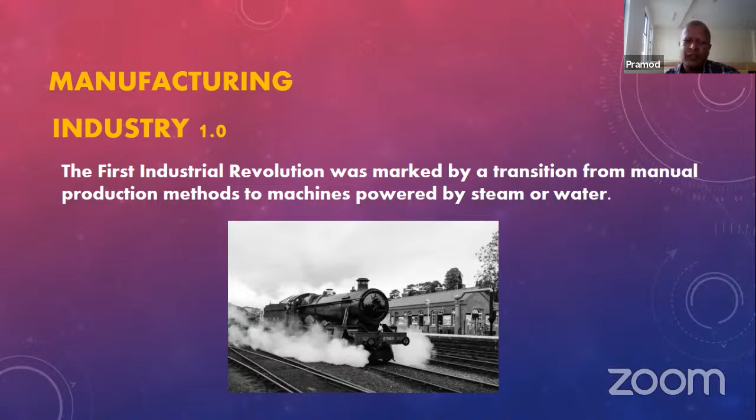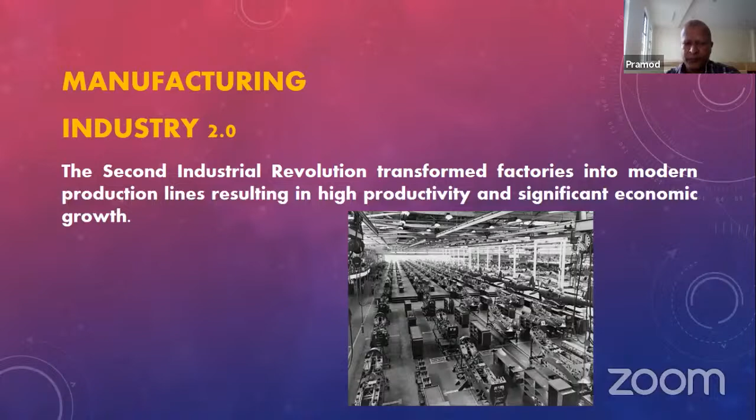So the world came up with the next concept, Industry 2. What did Industry 2 look into? Mass production. Machinery came into existence, high production came into existence, and there was significant growth in the economy. Mass production, which was considered the most efficient technology, was overtaken by lean manufacturing, which I've been discussing in the past 3 days. Lean manufacturing is a more efficient method than mass production, where we can zero down the inventories and zero down the defects. That talks about Industry 3.

Industry 3 talks about the technologies next to lean manufacturing, where we can use CNC machines. I think almost all of you know how a CNC machine works and how efficient it is compared to conventional machines. Even now, all the industries are using CNC machines; they have been in existence for maybe the past 5 decades. In Industry 3, I mention manufacturing which refers to subtractive as well as additive manufacturing.

Some might quote that additive manufacturing is Industry 4. I say it falls under Industry 3 rather than Industry 4. Why? I will come to that: why additive manufacturing doesn't fit there, or why it has to upgrade itself in order to fit into Industry 4. I will come to that in the next slide.

Industry 3 also had computer aided manufacturing. I think we all have knowledge of what CAM is, and we handle the subject CAD CAM, right? The NC program can be fed into CNC machines, and it will ensure the components machined out are of perfect dimensions. So Industry 3 was perfect even until 2010, and is even perfect now.

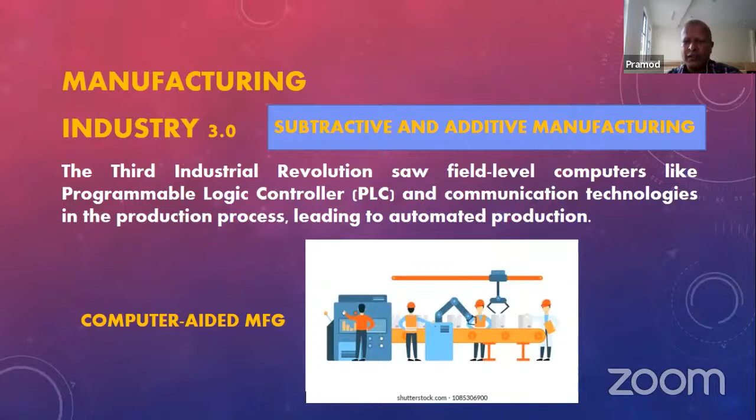So the next slide talks about Industry 4.0. As I said, it came a decade back, 2011. The term Industry 4.0 was first named by the German government. Germany was the one who tagged Industry 4.0, and I think most of you are already familiar with these terms: cyber physical system, IoTs. We have been hearing these words in the past year or few months.

So what is a cyber physical system? It's an interaction between the physical system and the cyber world. When it comes to manufacturing, they term it a cyber physical production system, which relates to manufacturing. Then again, Internet of Things, IoT. It depends what stream we are referring to. When we are referring to manufacturing, all the things which come into the cyber physical context are manufacturing things.

So let us leave CPS as well as IoT to the software people. There is not much mechanical in that. It's a communication between the systems. Even if we want to get well versed in CPS, from my point of view, it's a bit time consuming. So let us stick to the AI thing, the machine learning.

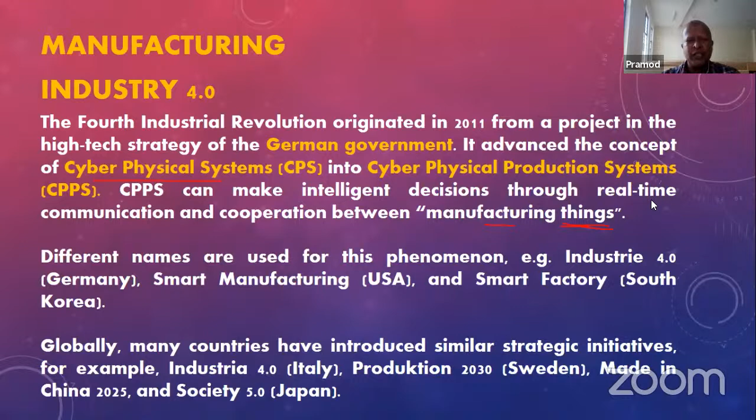So you can see Made in China 2025. They want everything to be made in China by 2025, maybe another 4 years. You know what happens when we talk about made in China; it will be made in China itself. Japan and Italy term Industry 4.0 in their own specific way. Even if India grows in AI in competition with Germany, the US and other countries, we can come up with a new term. But it all talks about one stream, the AI applications.

As I just mentioned, to avoid tool wear before it happens, to avoid machine breakdown before it happens, to avoid noises or vibrations before they happen, which is possible only by AI methods. So I term them as out-of-process condition monitoring, which was faced in Industry 3, and in-process tool condition monitoring in Industry 4.

So if we want to jump into the research topics now, other than materials - if you are in core manufacturing, I suggest jumping into in-process tool condition monitoring, which is nothing but what industry 4.0 grant people look into. These are the buzzwords when you talk about in-process tool condition monitoring.

Okay, so out of process tool condition monitoring - this has been adopted in industry 3, or you can say industry 2.5. So wherein if the tool wear happens, we have to stop the machine, get the tool out, get it studied, find the crater wear, find the flank wear, then come up with the solution for that. So during that study time the production is stopped, right? So that stoppage of production can be avoided by industry 4, what I call in-process tool condition monitoring.

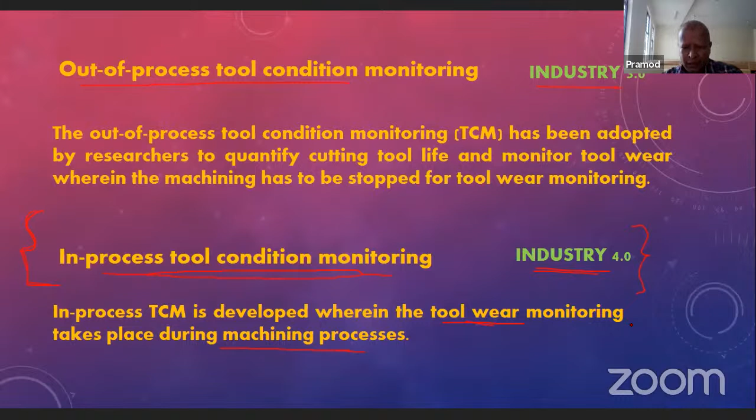So even if you go to the ISRO website, they come up with problem statements every year, and you will find this problem statement in their research problems, whatever they highlight every year. Definitely you will find here - they will mention it as difficult to machine, or machinability of the superalloys. So even they are working on it.

So in-process will not, I can say, provide 100% solution, but will provide much more solution when we compare it with the out-of-process tool condition monitoring. I will talk about this in detail later. So this is what differs between industry 3 and 4.

So to jump over to industry 4, as I said, using AI is not so easy, because we need a ladder in between these two. Right now the production, the industries are balancing on 3 and 2, or I can say 2.5 and 3. Now they're trying to jump over to the 4. Just to jump over suddenly to the 4 is not easy. Why I tell you - industry 3 all talks about computer integrated manufacturing, wherein we have been using computers to run the machines to get efficient way of production.

So as I said, industry 4 is whatever problem that exists in the automation can be solved by using algorithms. So how do we build these algorithms?

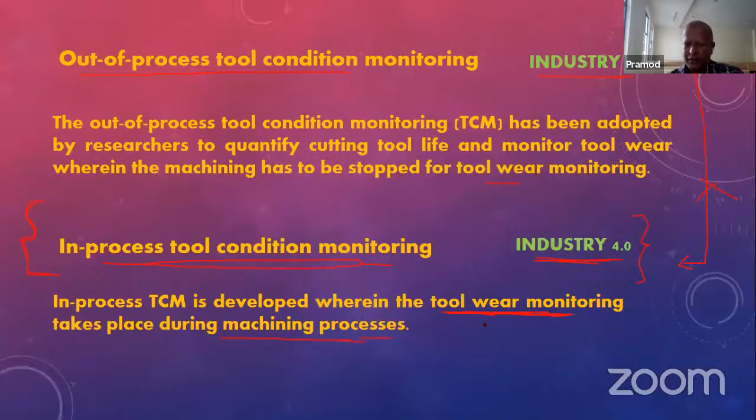And what problem? This is what it highlights - we can predict the tool wear of a particular cutting tool before it fails, before it breaks down. Okay, so Python, C++, it's a basket of arrays, it's printf, scanf, it has loops. All this comes in C++.

What happens, what the more enhancement in Python is, it's a bit more flexible compared to C++. So we can compile it easily, meaning less errors. Even if we miss some commas, miss some brackets, that will be fine by Python - it's more flexible for the users. That's Python. Even you can use C++, which comes in Visual Studio, to develop an algorithm. I will also show how to develop the algorithm with flowcharts.

Okay, so again, I think most of you are not familiar with Industry 5.0 now. Globally, some of them, 70% are talking about 4.0, remaining 30% are already into 5.0. Now this is a bit exhausting. We are into 4.0, we are just a toddler there. Now we talk about Industry 5.0. So what is this Industry 5.0?

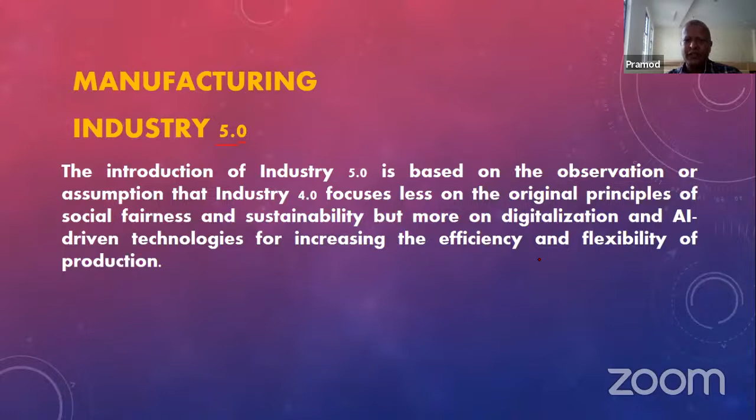So Industry 4.0 is a technology driven, AI based manufacturing. Industry 5.0 is a value driven initiative. And 4.0 focuses less on the original principles of sustainability, whereas this one focuses more on sustainability.

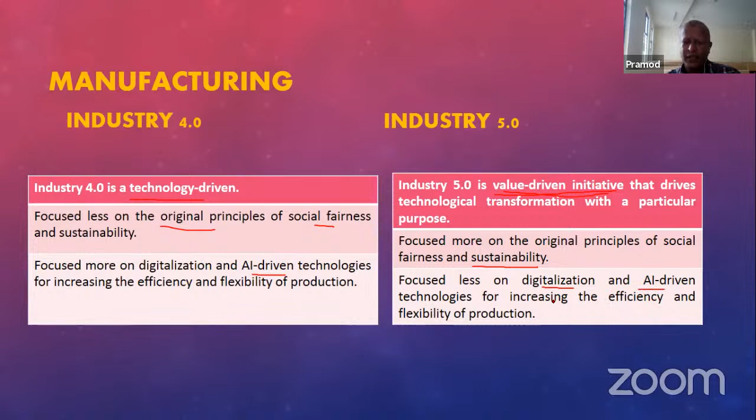So here we have AI driven technologies in order to control, in order to make it more efficient than what we found in Industry 3.0. Industry 5.0 focuses less on AI driven efficiency, and what it more focuses on is this one. So in all the aspects we look into this. When we talk about AI, that means we are looking into efficiency in terms of energy, in terms of efficiency, in terms of smart materials.

Okay, that's very good. So now what are the side effects of that? Economy, CO2 reductions, human centricity, because when we bring AI, already we have removed most of the direct labors, or maybe we are already out of indirect labors because we have CNC machines. So when we compare CNC with conventional, we need indirect labors more there, but when you talk about CNCs, we need less indirect labors.

Now when we talk about Industry 4.0, we even don't need direct labors, or their interaction with the machines is reduced. The percentage of interaction of the direct labors in production is completely reduced when we compare it to Industry 3.0.

Okay, so now what happens? That means there is a lot of job loss, especially in India. In India we are more populated, so we are less into automation. Even if you see small scale industries, they have lathe machines. We have a lot of people to work on that. Even whatever quantity is required, we can achieve that by conventional way. So what happens if even the industries of India talk about Industry 4.0?

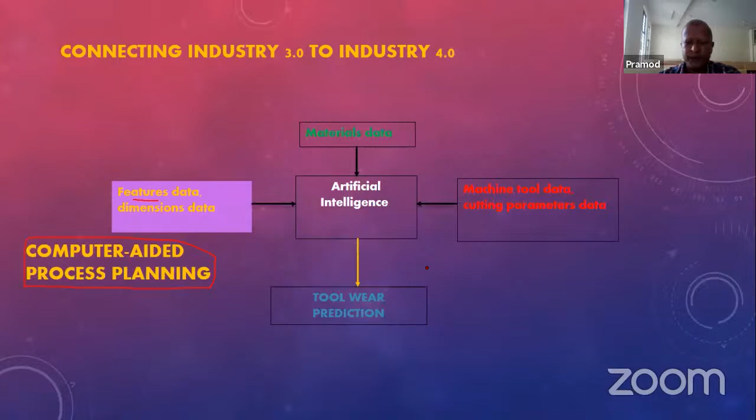So when we have all this data, we can go for the tool wear prediction, because when we talk about AI, it's automation—completely automated, or with 5% human intervention. So I term this CAPP as a bridge between 3 and 4, so it's 3.5.

So what manufacturing is all about, as I think we are already familiar with these stages: idea generation, CAD model, then CAM, machine out using CNC machines, we get the product. So what lies between these is the CAPP. What lies between these is the CAPP.

So this CAPP is built on these techniques: feature based, knowledge based, neural networks—almost all of you are familiar with this stuff—genetic algorithms, fuzzy logic, Petri nets, agent based. There is also the volume decomposition method. These are the most efficient approaches.

So wherein we can make the computer do the process planning for us. In order to do the process planning, it has to identify all the features. As I said, all the features means it has a cavity, a protrusion, a boss, a slot in it. So those have to be identified by the CAPP. So how will it identify? It's not a human being. So we have to make it identify. We can depend on these techniques.

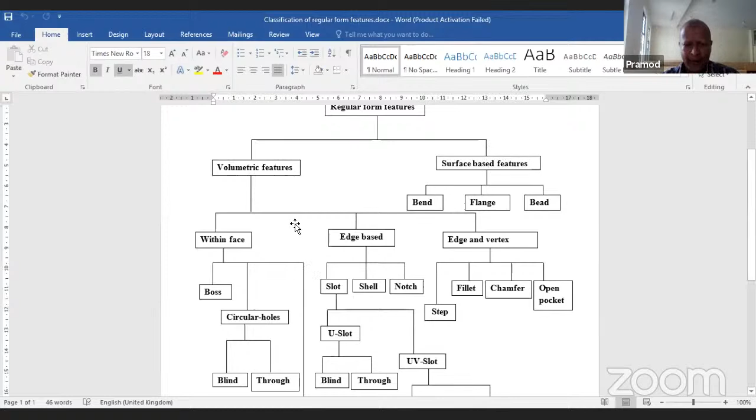And surface based features are the ones which have thickness less than 3 mm, maybe our cell phone covers, they are surface based models. Or when we talk about automotive components, the BIW, body in white, or the car models, they are surface based models. So when we design using SolidWorks, we can create a surface based model which can be used for meshing and analysis, and we can create a solid model which has a mass in it.

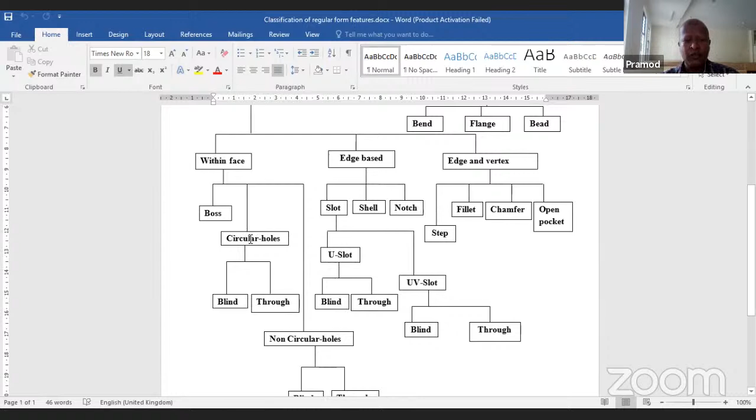So we can further subclassify them based on the type of faces and the edges they have. Notch and slot we are familiar with, shell features, and UV slots, U slots; again they may run through the component, or not run through, which I call blind. Drilled holes can run through the component, which we call through holes, blind holes, and non-circular holes. Non-circular holes are also called pockets, so again we have through pockets and blind pockets.

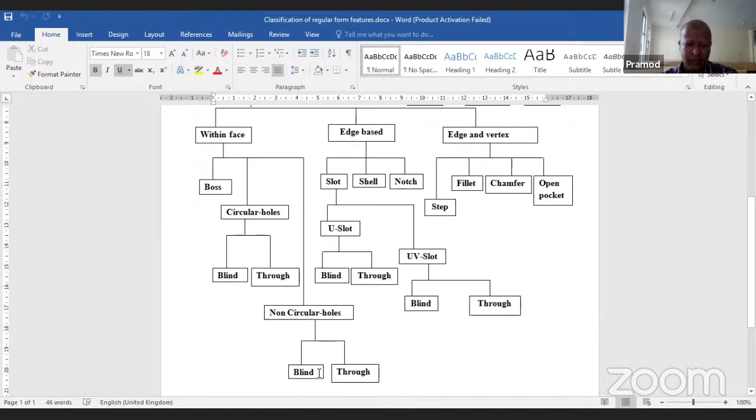So this is about the regular form, where the components have planar surfaces, completely made of plane shaped surfaces. What about irregular surfaces? As I mentioned, impellers have blades with spline based surfaces, so they are very difficult to identify. So how to identify them? There we come across the term topology. Topology includes the surface, the edges in it, the vertex points in it. We can use those topologies and build an algorithm on that.

So volumetric features in terms of free form, we can call them free form slot, free form hole, free form boss. Again, surface based features: bump, ridge, dart. So we first classify them, how we are going to identify them comes later, and I will again go back to the PPTs.

Okay, so I just classify them as regular free form. Okay, so coming back to the V block. Okay, so I've taken one example here. V block, I think most of you are familiar, we use in the metrology labs.

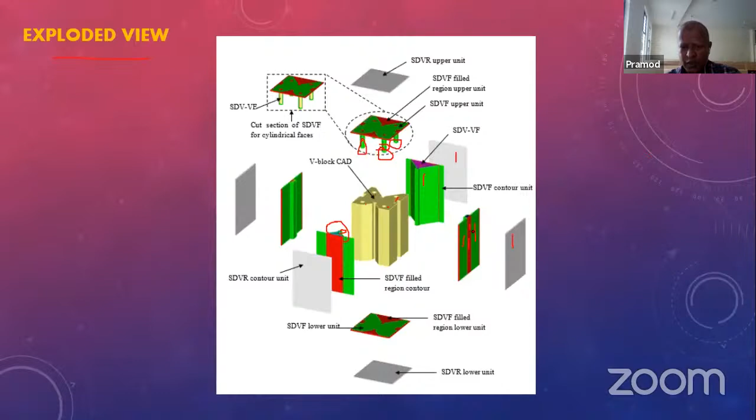So what is the total material that has to be removed? This is called roughing. Sub delta volume for roughing process, sub delta volume for finishing process. I just term them as per their processes. So this gray color includes the roughing process, and the green color includes the finishing process.

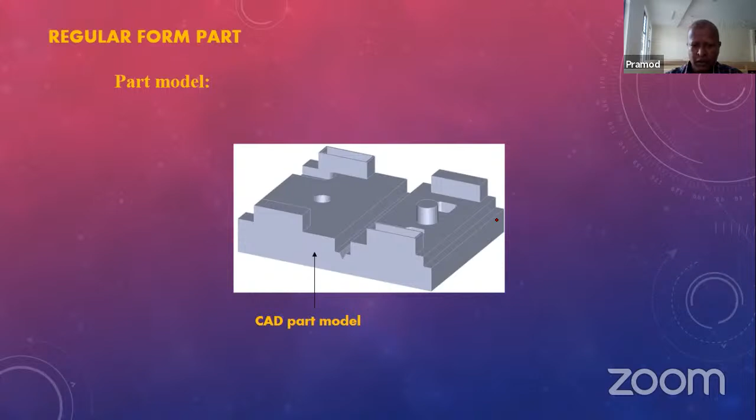Okay, so this is about the V block, what we can achieve using the CAD model by CAPP. Next, what happens if we have a more complex regular model? So this is a bit complex regular model. So what our algorithm can do, it can identify the features or not. So when we input this to the algorithm which has been statically built,

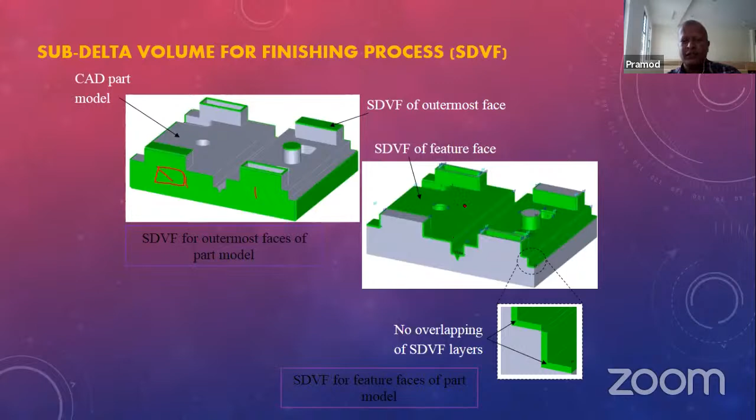so here it's a reverse engineering. We can get all the material that has to be removed, or I say that is removed. Okay, this is the finishing layer, and one more way of identifying the features is by these combinations. So CF means chamfered face, and B means boss face, and P means peripheral face. This is chamfer face. Okay, so I will just tell you one example here.

So let us look into this through circular hole. Okay, so how does this make? Here is the combination. So by algorithm, we can designate the surfaces or faces of the feature. So we have a component, we have a drilled hole. So the drilled hole has some surfaces in it. So we can identify the shape of those surfaces and designate them.

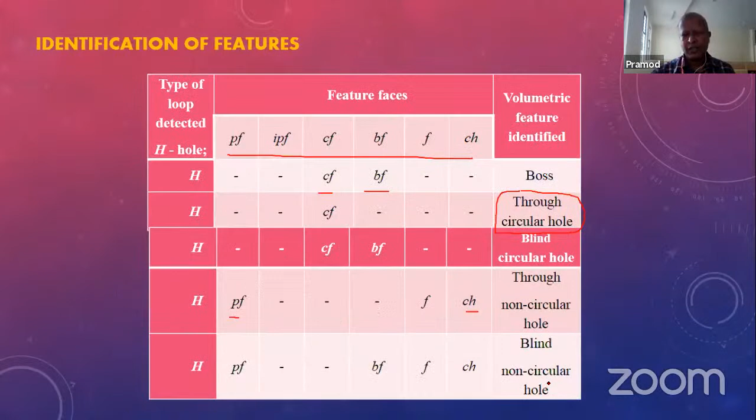Okay. So planar face, then planar face, filleted face, planar face, filleted face. So what this combination makes, it makes a pocket. So when we come to a drilled hole, circular faces, circular faces. A drilled hole means it's circular in shape, so it has circular faces or surfaces in it. So we can designate them. So these two combinations will give us what actually the feature is. Again the algorithm looks into this, it designates them, it comes up with the feature name.

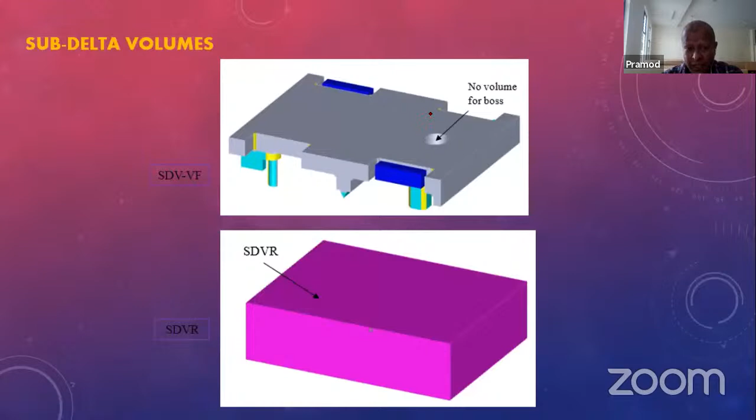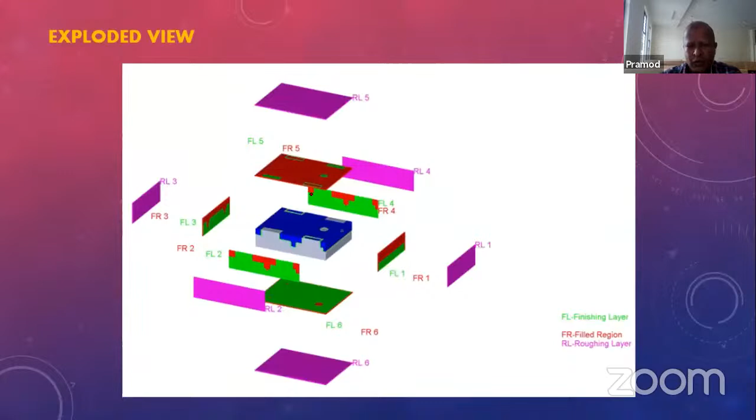This is another way of identifying the features, generating the material for that. So if you see, this is what material has to be removed in order to get the original component. So again, this is the exploded view. As I said, you can see the number of layers, or the colored materials, that have to be removed to get the particular shape. And also the quantity of the materials data can be achieved by these algorithms.

Okay, so what about free form? Some of you might be thinking, what if we use the impellers, if we use the car model? So these algorithms are built for volumetric features, volumetric part models, which have mass in it. We cannot use that for surface based features. If you have to, we can, but we have to look at the APIs, application programming interface functions. So we use APIs here. It's open source libraries we can get. So based on APIs, we can go into surface based part models.

So free form, again we can identify these features, then do the reverse engineering, build the materials. And you can see the missing material can be re-achieved by the algorithms. So how to identify? Because these are irregular shaped, we cannot name them. Next time this shape may be another way. So based on colors we can identify them. Wherever there is a planar face, we can give a color. Wherever it is spline based, we color it another way. Where it is cylindrical, another way. So these colors can be made standard and we can identify based on them.

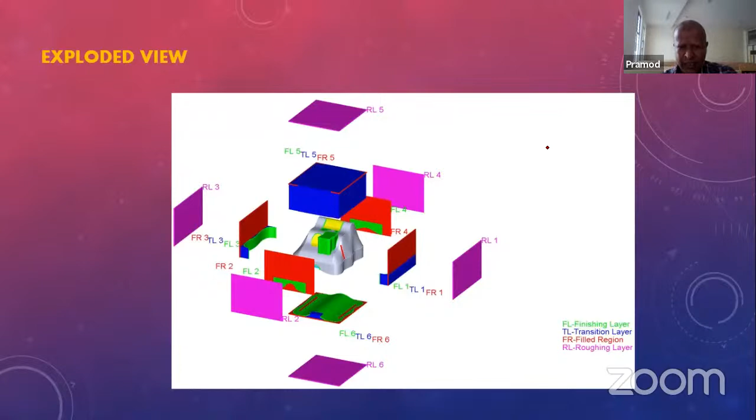So I will just highlight how to build these algorithms. As I said, I did this on the C++ platform, Visual Studio. So I will just highlight the flow charts which are used to build all this or to study these three cases.

So we can even get the chart of all the various color materials, which is the major material that has to be removed, and we have some equations to be used there. So level of complexity can be found, whether the component is complex or simple and can be machined out easily. Impellers are a complex component. So level of complexity, we can rate from 0 to 1. So 0.89, 0.79, 0.9, based on the shape.

Okay. So I'll just go back to share the flow chart here. I cannot include it in the PPT, it's a very big flow chart. So kindly permit me, I will just unshare this and share again.

Okay. I think the Word file is shared on your screens. No. No, brother. Okay. Let me try again. It's okay. Let me try again.

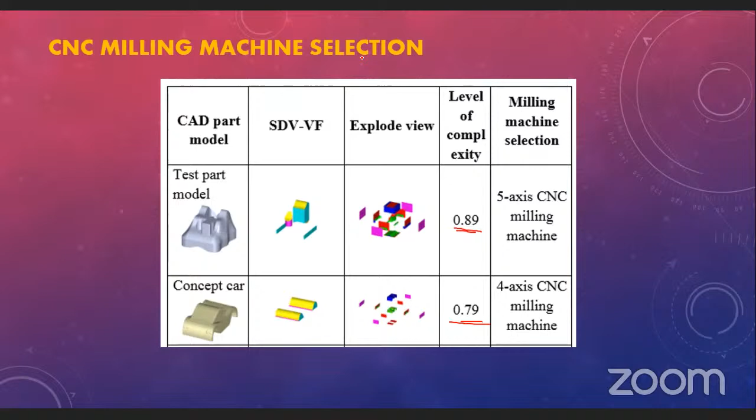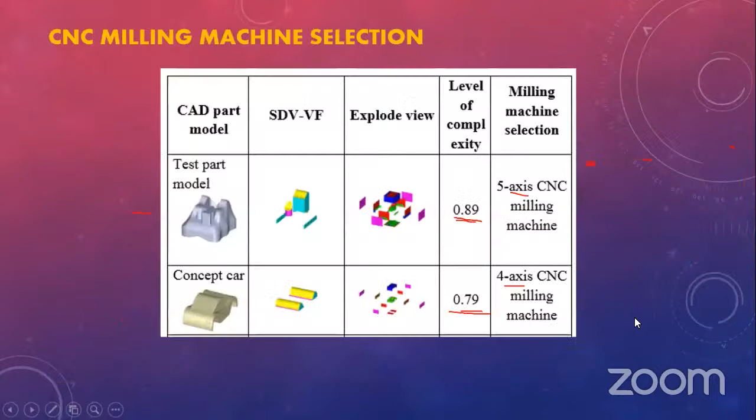Supervised learning. We will more focus onto this. So why we need supervised learning? Why we not talk about unsupervised learning? That's why I quoted here. Supervised learning means the training of a machine to enable it to choose a function describing the relation between the inputs and outputs. So by this supervised learning we can get the outcomes for what we have input. Here inputs refers to the machining parameters.

I said about machinability in my previous slides. Machinability of superalloys is very difficult. Some of you might be researching into that. Because the cutting tool has a catastrophic failure, we cannot say it fails at this particular cutting speed, which can be done in case of other materials. That catastrophic failure is the major cause. We cannot say at this cutting speed the cutting tool will fail for superalloys.

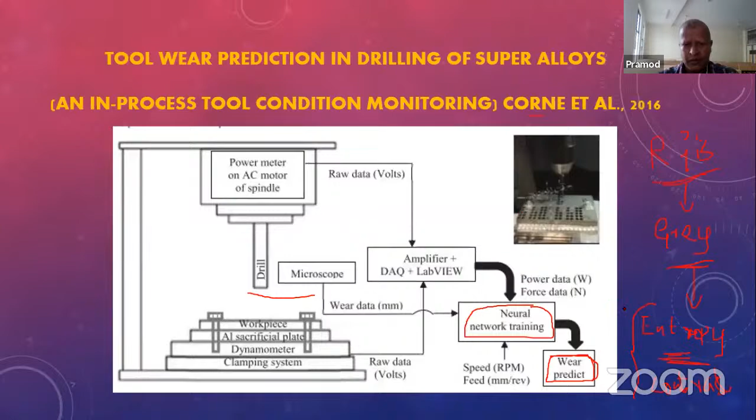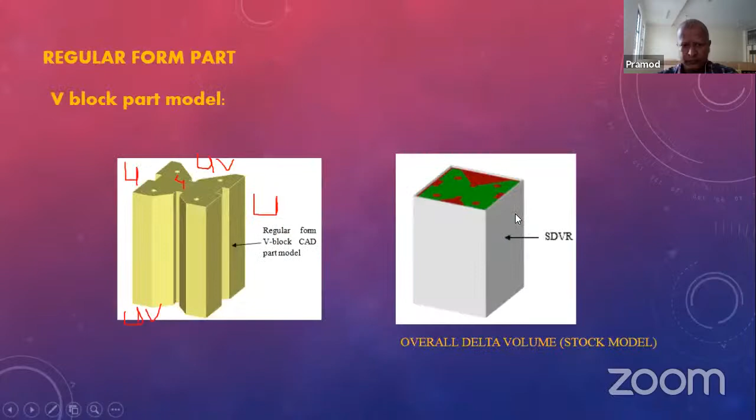I'd like to highlight one more point here. Coming back to our complete manufacturing model, I think now we have an overview. So idea generation, CAD - it's almost achieved. I'd like to highlight one point in this CAD. Has anyone heard about CMM? It refers to metrology. So can anyone derive what CMM is?

Coordinate based recognition - that's correct, coordinate measuring machines. So we have pointed machines wherein the pointed tool will come which can measure any complex machine, so we can measure the dimensions there.

So it's a way meaning the machine has to come in contact with the model to do that. These are tried to be replaced by 3D scanners now. So all of you are familiar, these are being replaced by 3D scanners. They are not up to the mark. It's being used, but very few industries are using these 3D scanners.

So wherein you use a portable gun type, you just run it over the component and you will get the model in the system. I will tell you what the drawback is.

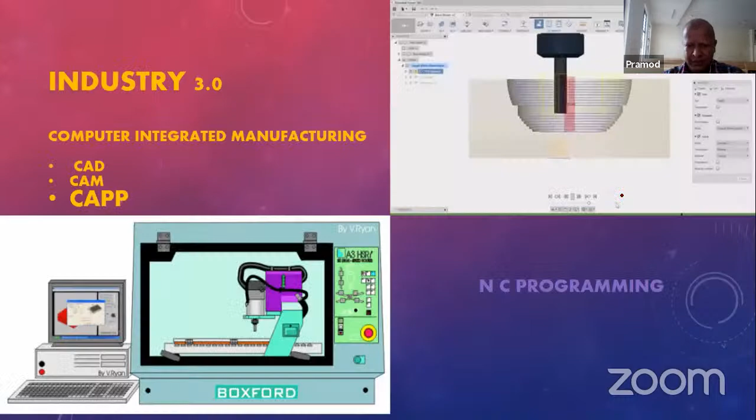So coming back to these AI methods, even you can use these AI methods. You can currently work on this, you can use it for all your research areas.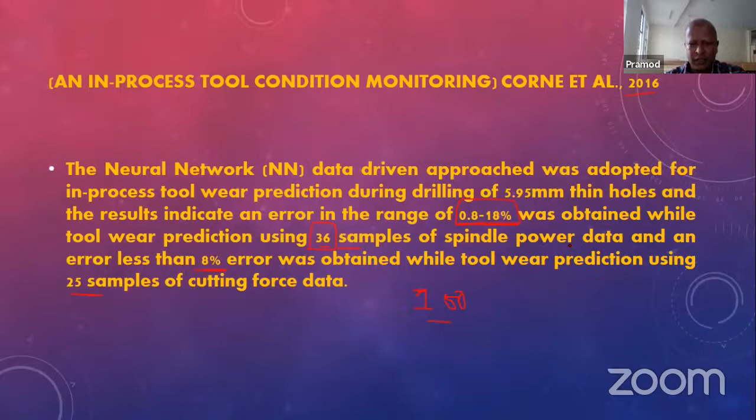I just want to end up saying that now we are talking about industry 4, industry 5. Soon there will be industry 4 plus, industry 4.5, industry 6 point, industry 7 point. So they are not too distant far, but they may dawn upon us soon.

So with this, I am open to questions. I hope I was able to highlight some of the current scenarios.